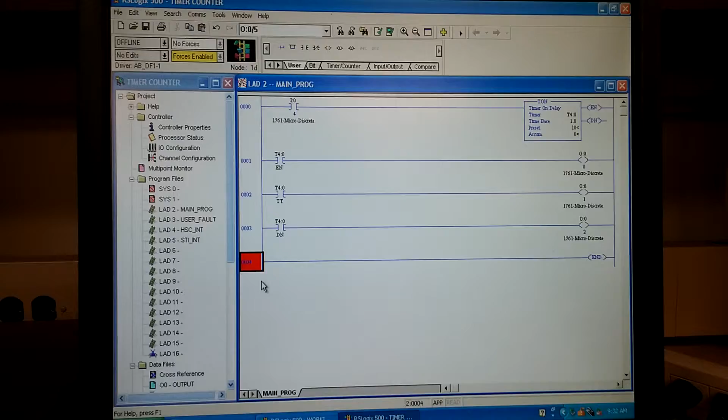Alright, so to continue with part 2 of the counter, I just broke them up into 2 videos. Makes it a little bit simpler if you know how to do one but not the other. Say maybe you've seen somebody do it before, or you feel like you're grasping the concept pretty well.

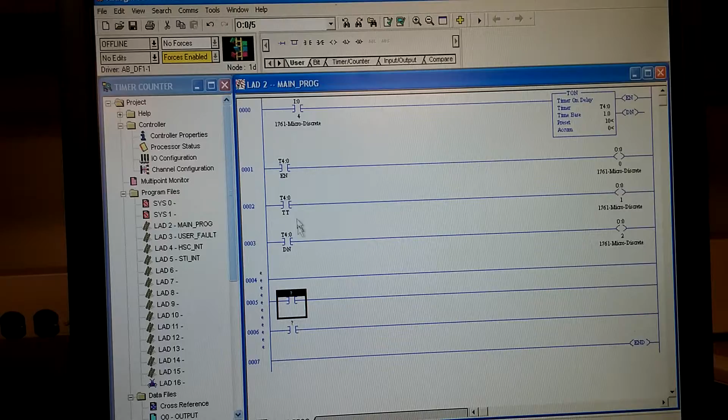I'm going to go ahead and add 3 more rungs. On each one I'm going to add another examine if closed. And on here, I'm going to throw a counter up. It's very simple, easy to use. Counter down works the same way, except obviously counting down rather than up.

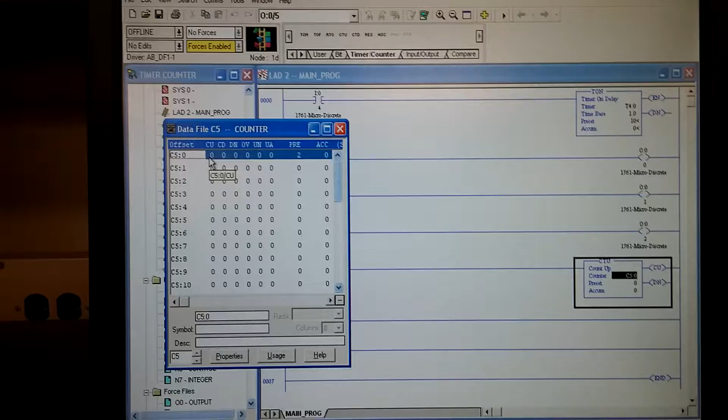Just drop that right in there. And then with these right here, I'm just going to use count up and count down. Count up and done. That's not count down. Once again, same concept. If you had to count down, you'd use CD instead of CU.

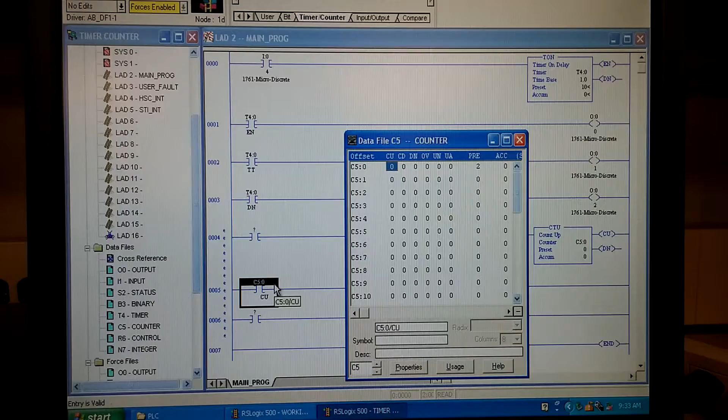So I'm going to go ahead and use CU. CU is basically the enabled of the counter. As long as it's running, it'll activate. I'm going to use counter done. Obviously, whenever the counter reaches the set value at which I want it to be, it will be active.

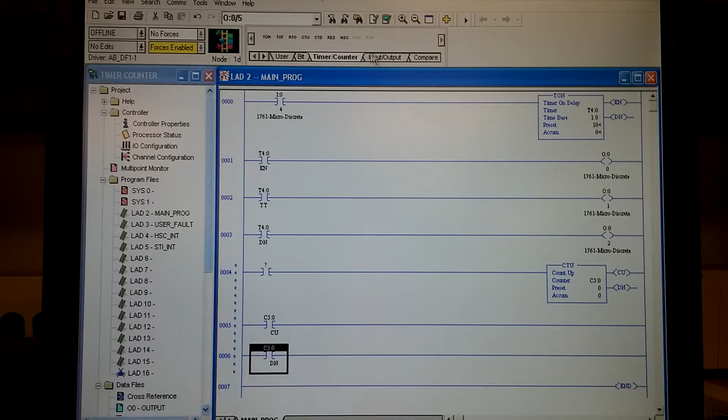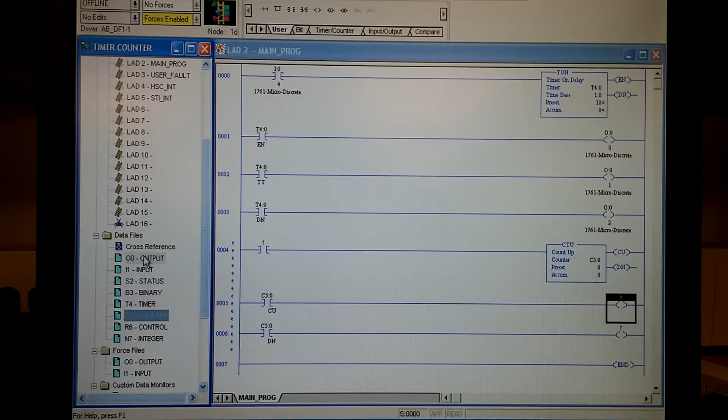So, I'll come up here. Got my counter, and so now I want to flip it over back to my user so I can add an output, and an output. And then I'm just going to make this pretty simple. And let's do my outputs. I'm going to start with output 04 and 05, so therefore they're on a different line.

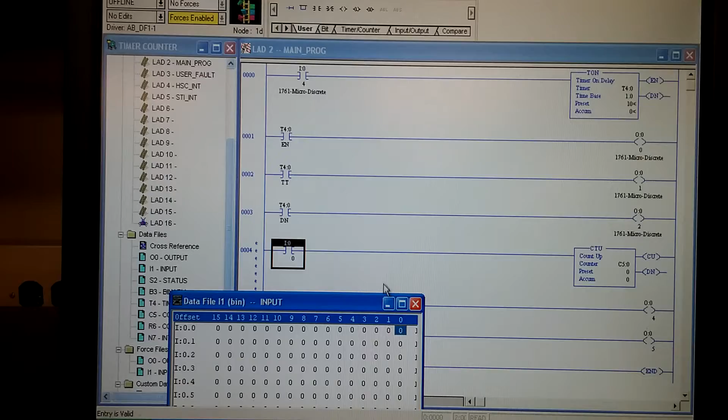And I'm going to do input 00, because it's a simple push button. So it'll be very easy to make a count. Last thing we need to do is make a preset. Let's do 5.

Alright, so we've got our input, counter, counter up, output, counter done, output. So let's go ahead and download this bad puppy.

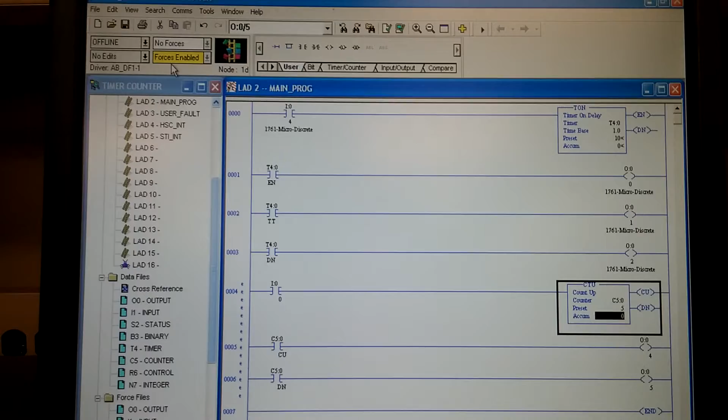It asked me if I want to download it. I said yes, proceed whenever it goes into run mode, which basically means I want to be able to run it whenever I'm done downloading it. And obviously the answer is yes. And go online. So I'm going to show you the screen first, and then the actual unit itself, and then the combo of the both.

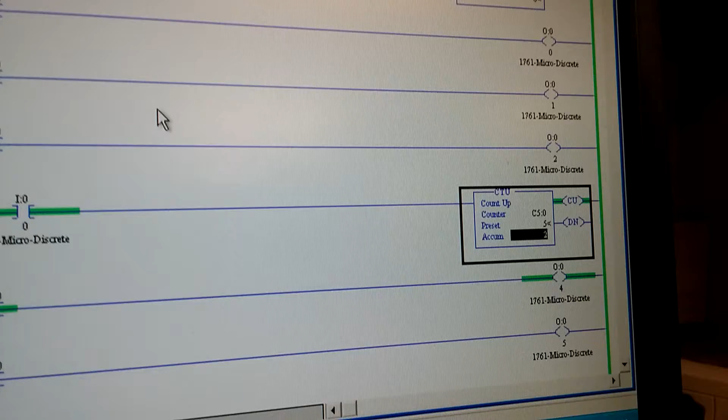So, first thing we're going to do right here, registered it once. If you noticed, these two light up because it is enabled, just like how we had our timer up there. And then I'm also holding down the button. So therefore, counter up, lights on. I'll let it go.

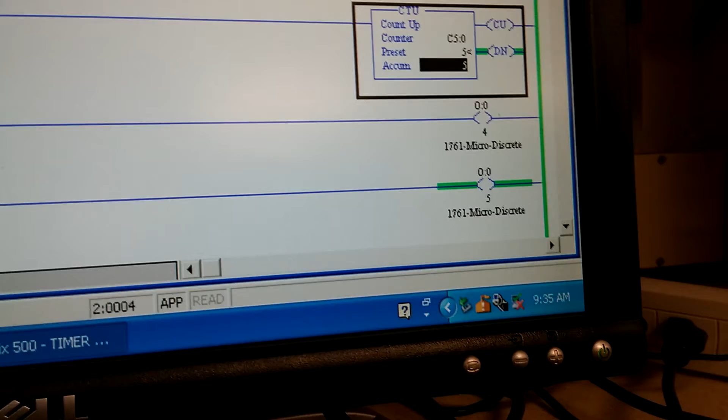And we are at 2, now 3, 4, and 5. It is now constantly done. Therefore, the done bit lights up, and therefore, our output lights up.

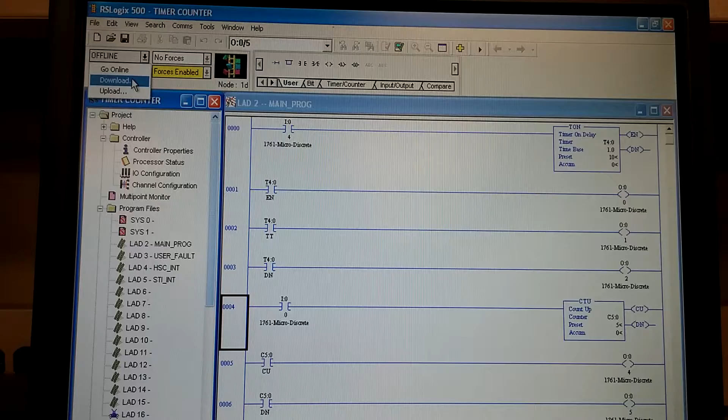So, what I'm going to do here is come back out here, go off the program, go right back on, and download all over again. There are more simpler ways to do this, but I don't want to throw in any extra parts that I don't have to for you guys.

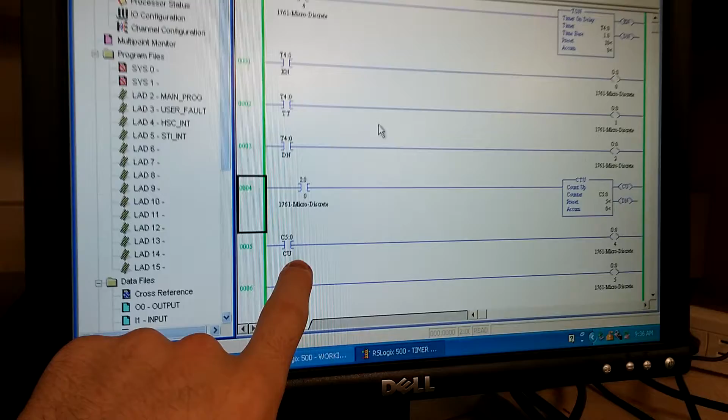So let's just do a little quick review. I'm going to be pressing the push button. Whenever counter up comes up, it's going to light the light, which will be the first light, which will be red, and this light will be yellow. So whenever it's done, or it hits 5, it'll light up.

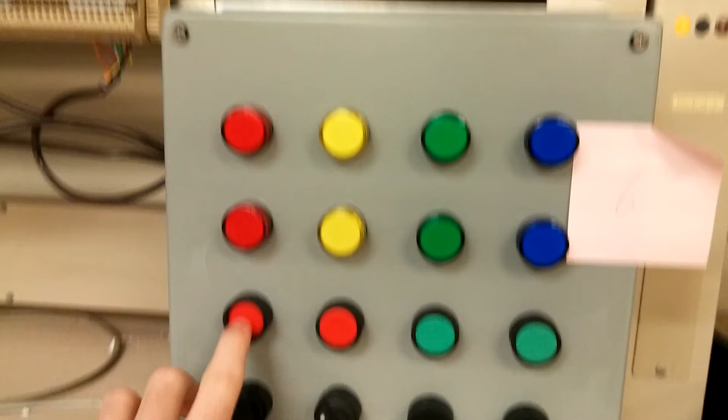Alright, so I hit the button, lights up once, twice, 3 times, 4 times, and finally, 5 times. Alright, and that is how you do a timer and counter.